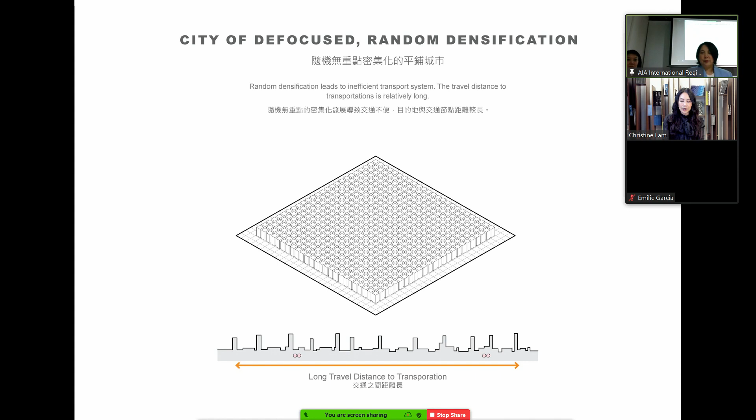Defocused city planning or random densification can lead to an inefficient transport system, where the travel distance to transportation nodes is relatively long. As such, high-density clusters are best positioned over existing transportation nodes to reduce journey time and frequency.

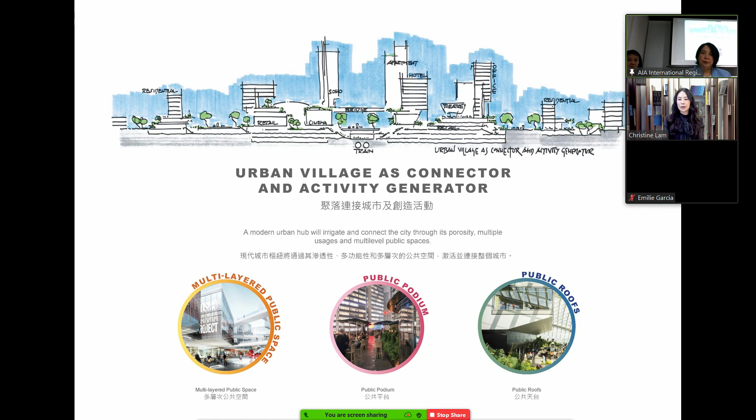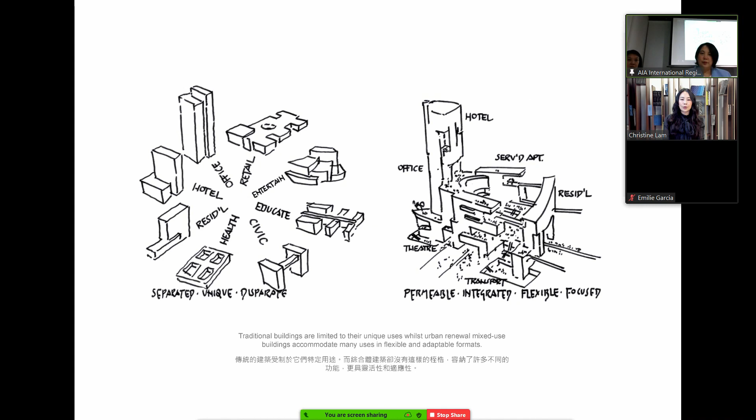A modern urban hub, as a connector and activity generator, will enrich and connect a city through its porosity, multiple usages, and multi-level public spaces. Traditional buildings are limited to a single use only, while urban renewal mixed-use buildings can accommodate many uses in flexible and adaptable formats.

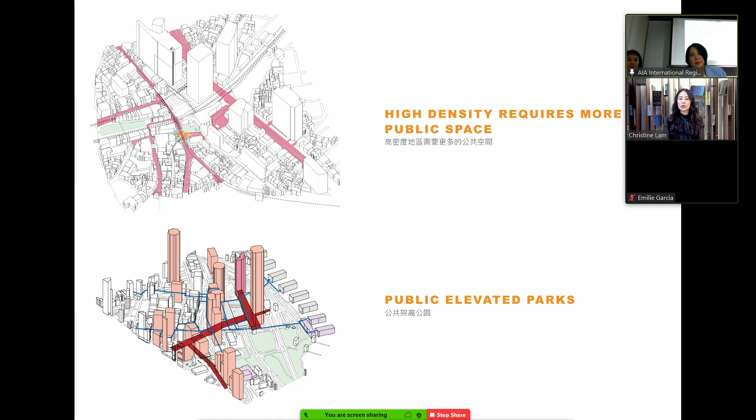Obviously, high density would require more public space for social and cultural interaction, more variety in functional usage, and more transportation means. Existing historic nodal points may already be located next to parks, greenland, and water bodies, so it is efficient to densify these nodes.

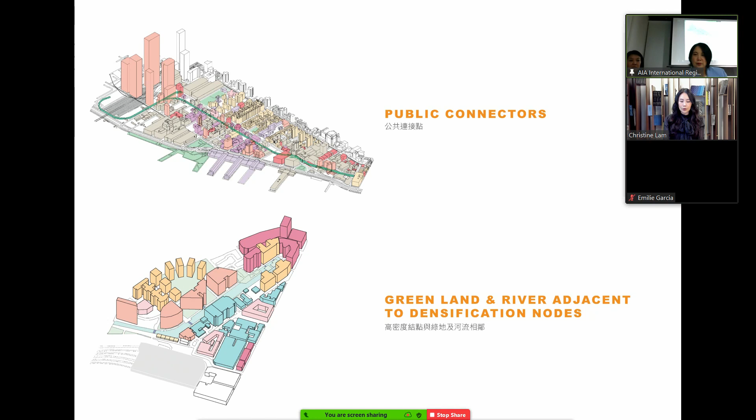Today, four examples are drawn from different cities to demonstrate the new urbanity. The first case study is Shibuya in Tokyo, a great TOD example of vertically stacked mixed programs in tower forms.

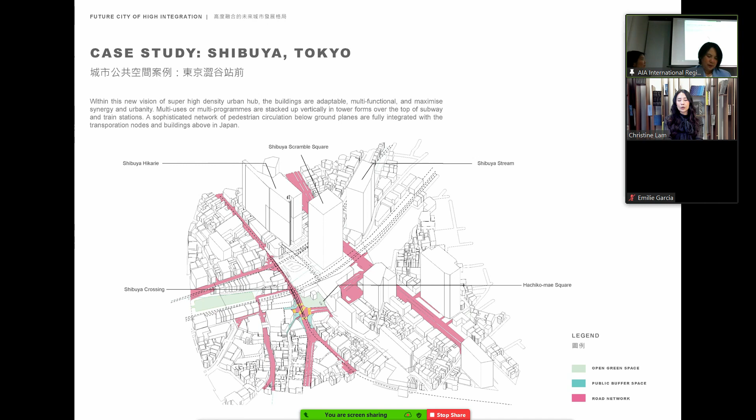The super high-density urban hub has been built right next to Hachiko train station and on top of the city metro lines. For people who don't know Hachiko station, if I say it's Shibuya's famous crossing, the station with a statue of the dog, that may ring a bell. The hub is fully integrated with a sophisticated underground circulation network to connect the city center.

New office commercial towers such as Shibuya Stream, Shibuya Hikarie, and Shibuya Scramble Square are all adaptable, multifunctional uses that maximize synergy and urbanity. You look at one tower, but it's got hotel, offices, conferencing facilities, theaters, and shopping malls, all in one tower form.

This demonstrates a mixed vertical city, a 24-hour city life, super vibrant, and it works not just for Tokyo but also for many other cities in Japan. The pedestrian crossing you see at the bottom left corner is the famous crossing in front of the Q Front Tower - a signature scene representing the Tokyo lifestyle.

The second case study brings us back here to Hong Kong Central. The elevated footbridge system connects office towers and shopping malls from the mid-level hills through the financial district, the IFC and Exchange Squares, all the way to the Harbourfront ferry piers. The blue lines you see are all the decks and bridges linking the towers.

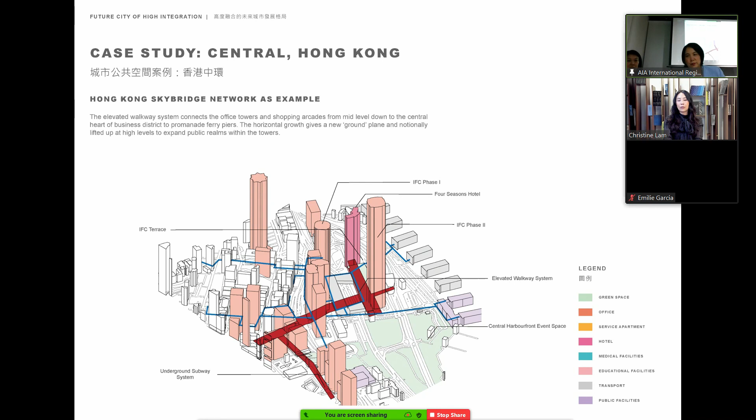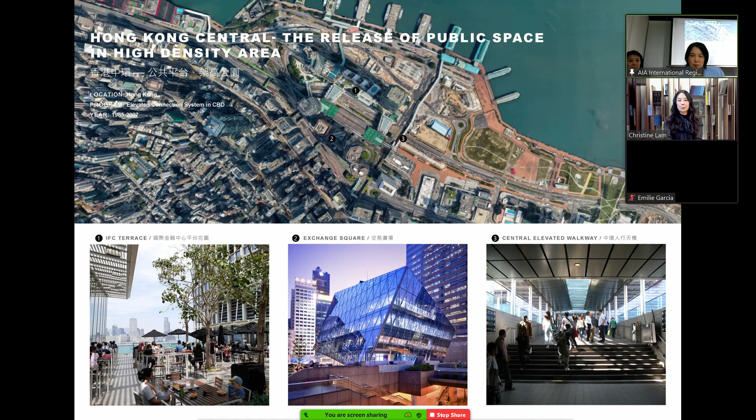Below ground, shown as the red box, is the MTR station box with tunnels and exits that link up the towers and malls vertically. So the horizontal growth gives a new ground plane, notionally lifted up at high levels, to expand public realms within towers and offer more open spaces.

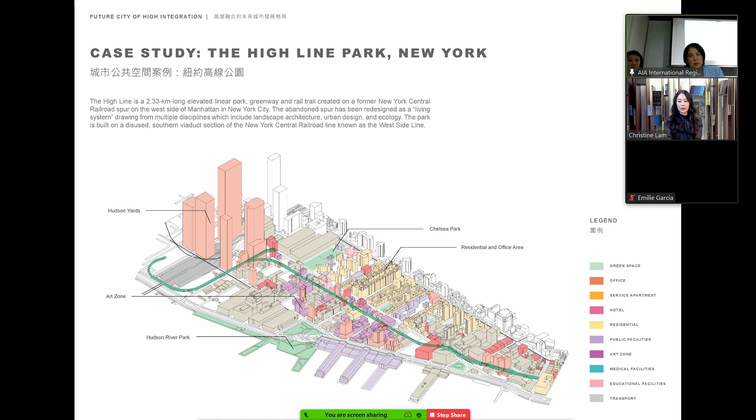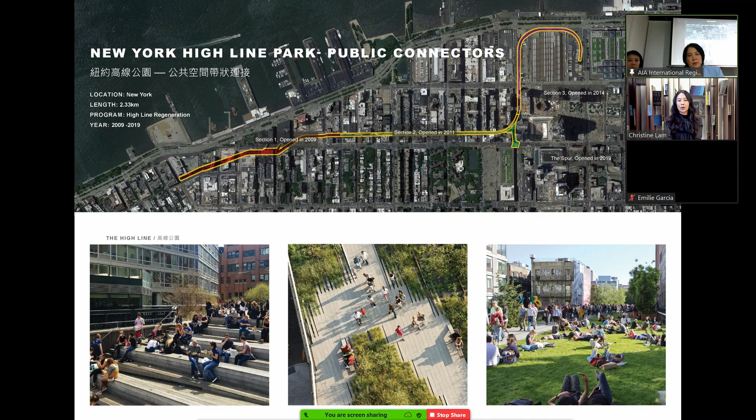New York's High Line is another example of a horizontal connector creating a new urban hub. An existing historical rail line track was transformed into an elevated linear park two kilometers long, stitching Hudson Yards with other mixed commercial, social, arts and cultural activities along the Hudson River. It totally revived the old neighborhood from a disused area of industrial buildings into an energetic community of working, living, and recreation, full of city life.

In West London, the regeneration of Paddington Basin is an industrial redevelopment creating a vibrant new office quarter close to the City and West End. It is just 15 minutes from Heathrow Airport via the Heathrow Express, making it a highly desirable commercial location.

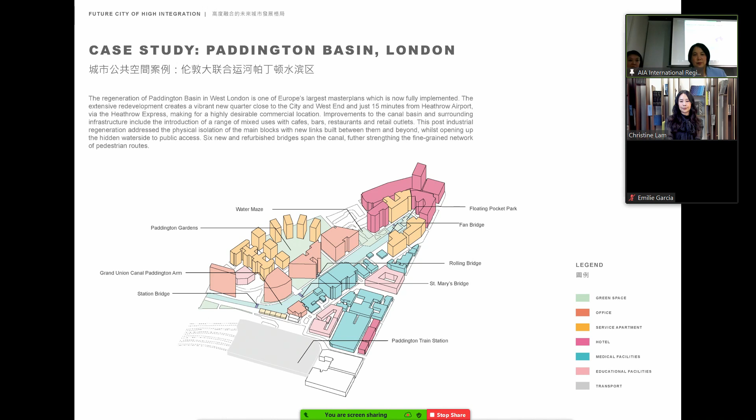The planning includes six new or refurbished bridges spanning the canal to strengthen the fine-grained network of pedestrian routes. The introduction of a range of mixed uses with cafes, bars, restaurants, and retail outlets not only supports the local community but also draws many visitors. The urban landscape is enhanced by opening up the hidden waterside to public access.

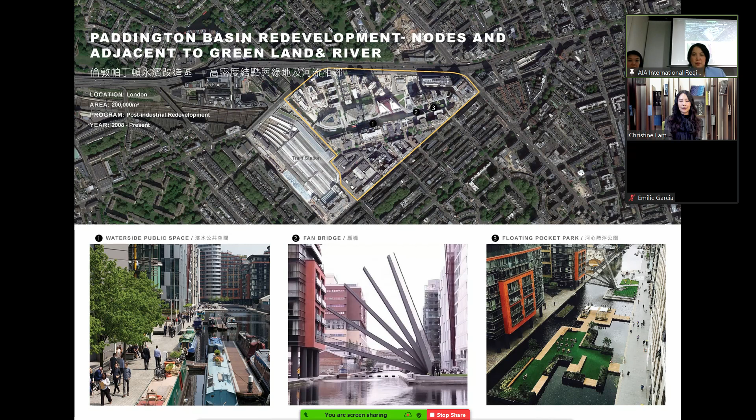In conclusion, we learn from these case studies that well-planned high-density urban hubs can create live, work, and entertain dynamics. Modern mixed-use development models can integrate open space with mixed recreational, residential, and commercial use.

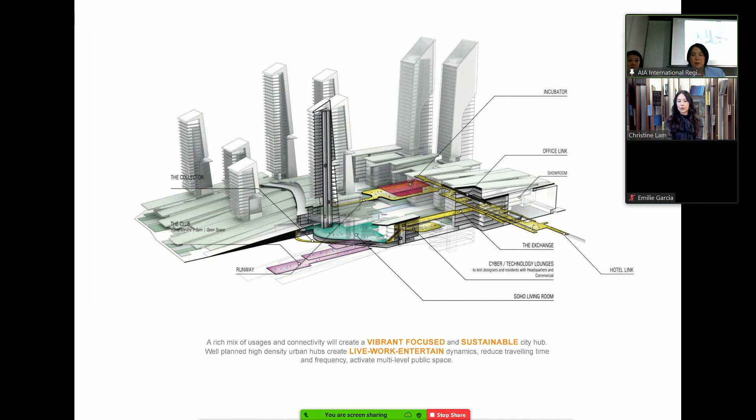Up to year 2020, there are a total of 686 cities in China. Over 60% of the population are now living in cities. So rapid urbanization, if not controlled or unplanned, could lead to inefficient urban sprawl, increasing social inequality, overbuilding expensive infrastructure, and pollution exacerbated by longer commutes.

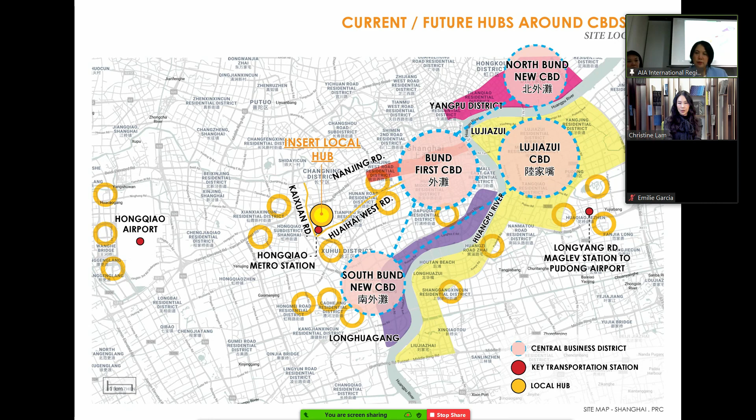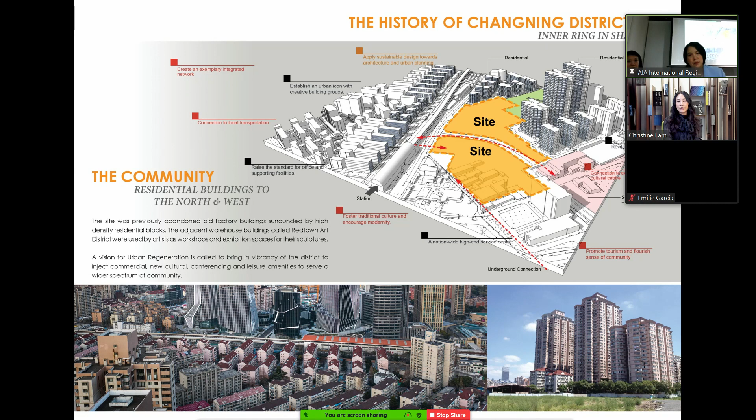Changning District is an old, dense residential area where the project site is a brownfield regeneration—it was an abandoned old factory site. After the buildings were cleared out, instead of hoarding up the site, the client planted a yellow rapeseed field and opened it for the public and neighbors before construction started.

Right next to the site, the adjacency is a group of warehouses called Redtown. It is an artist village with workshops and storage, but it was underused and lacked interaction with the neighborhood.

Within an old city fabric of dense population, the Shanghai government enacted its vision to energize the Changning community by creating a new local hub as a strategic node close to the Nanjing Road city center.

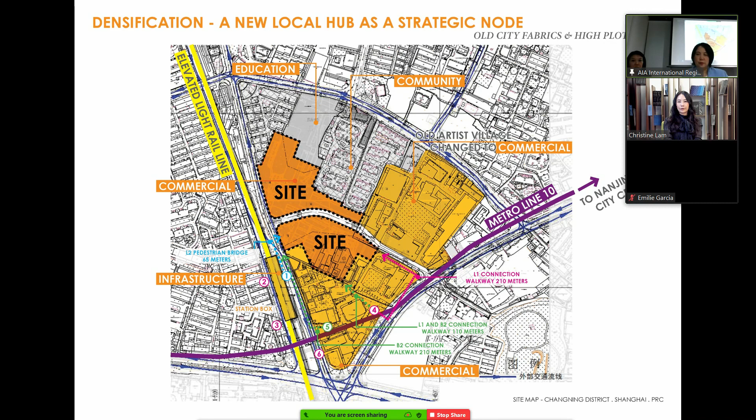Next to our site, shown in light orange, is Red Town, which has already been rezoned to commercial use and is now under construction. Combining all 3 parcels in orange color, since they are all commercial use, forms a sizable local hub of mixed-use development that joins up with the local fabric of residential area to become a bigger community.

The brief called for a mixed-use development to form a bigger community—a place to live, to work, and to play.

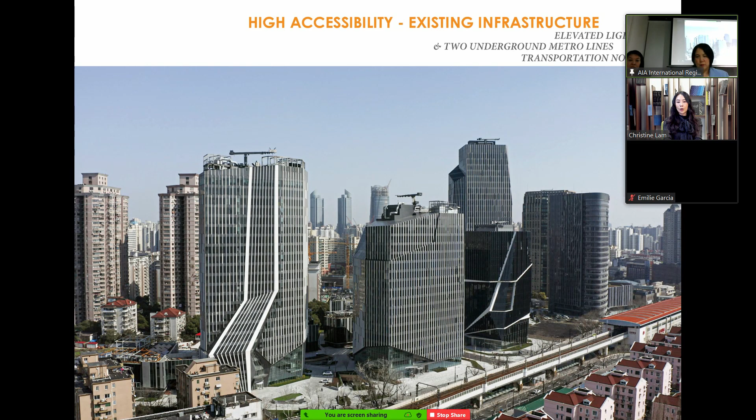The site fits perfectly the urbanization requirement, like high accessibility to existing infrastructure. To the bottom right you can see the elevated light rail station, which is only within 5 minutes walk to 2 other metro lines underground.

In order to create a vibrant business and social hub, there must be mixed programs offering a variety of building functions such as retail, office, arts, cultural, and exhibition. The conventional financial district only focused on office use with very few amenities, but an integrated community hub proves the success of a symbiosis of working and social experience.

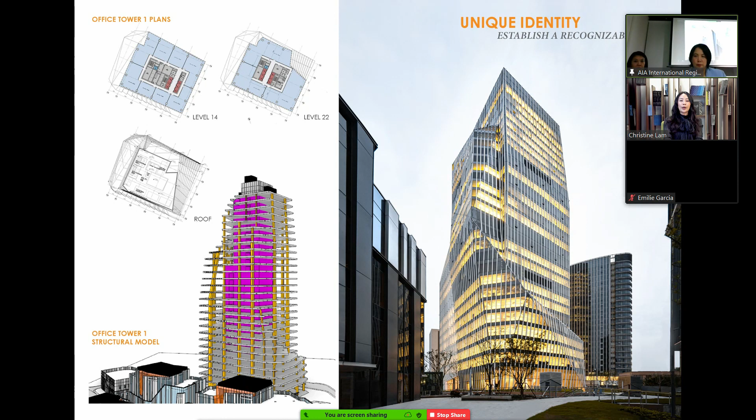A community also looks for a sense of place. A unique architectural identity would help establish a recognizable icon for the public.

There are a total of 4 towers in this project, and you're looking at one of the towers, which is the tallest, at 140 meters tall, with a funky form.

Distinctive character was designed for each tower, so the tower forms varied for all 4 towers. It is a collection of sculptural objects forming the new cityscape.

The site is an odd and irregular shape cut into half by a public road. Placing all 4 towers away from the existing residential towers is a sensible approach, but more importantly, our towers are not blocking the solar access to the existing residential units.

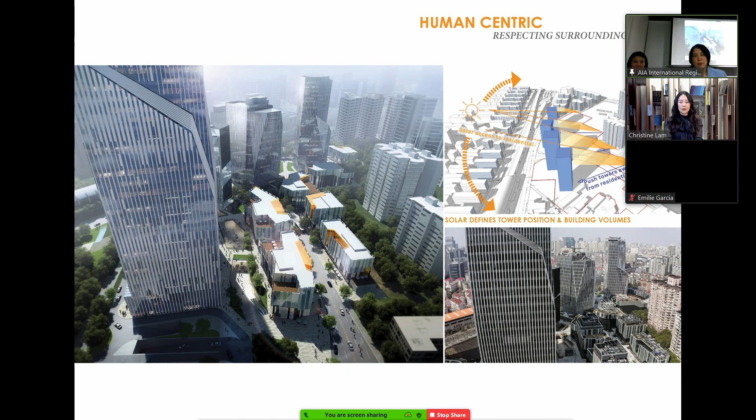By building codes, we have to ensure the existing residential units all have a minimum of 1 hour solar access on the solstice day through the lounge window and bedroom window. Therefore, the solar constraint basically defines the permissible build volume, shown as the orange wedges in the top diagram. The resultant mass of our buildings is cut and shaped to fit within the orange jelly boundaries.

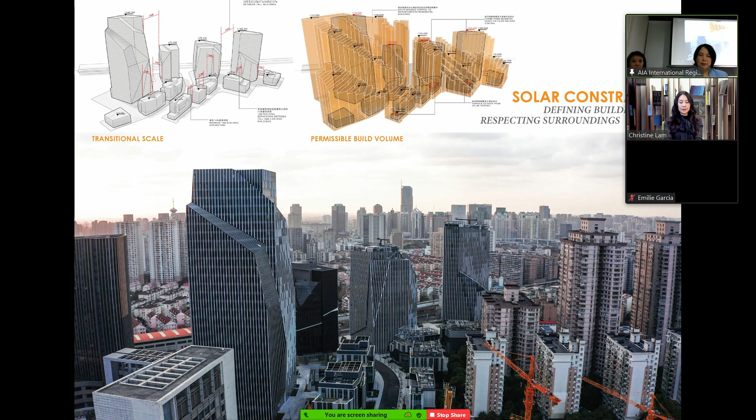The building forms gave us the inspiration of the rock-cut mountain in Chinese ink painting of landscape, depicting solid and void through strokes of lines. The painting technique was translated into our facade design.

The line strokes become the vertical thin features that give a very good sun shading effect. The solid pattern also helps reduce light pollution to the surroundings by simply reducing the glazing ratio of the curtain wall.

Since 2020, Shanghai is promoting a sustainable business center model 3.0, where the first CBD on the Bund is version 1, Lujiazui CBD on Pudong is version 2, and business center version 3 asks for diversified, adaptive, and flexible use of space, making the business center a sustainable place to be.

Our project started design in 2015, six years ago. Back then, the client already had the vision to create a new office hub to attract startups, tech companies, creative industries, and the like.

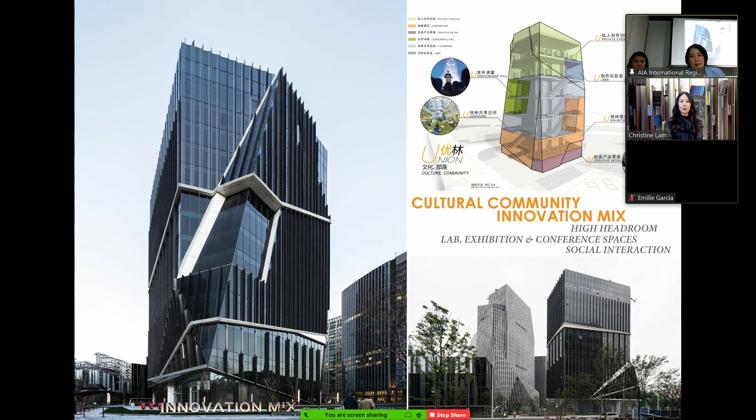One of the towers, the black little tower, is designed to be a vertical stacked cultural exhibition center. It is a flexible floor space to accommodate labs, conferencing facilities, and showrooms, with 9 meter tall floor-to-floor flexible space stacked up vertically in the tower.

Combining with the office function, holistic business amenities to support office growth is vital to make the local hub sustainable. The master plan has also considered maintaining neighborhood quality.

One of the key features of Old Shanghai Village is the Li Long streetscape, and we chose street pavilion blocks over a big podium solution to make the site very permeable on grade.

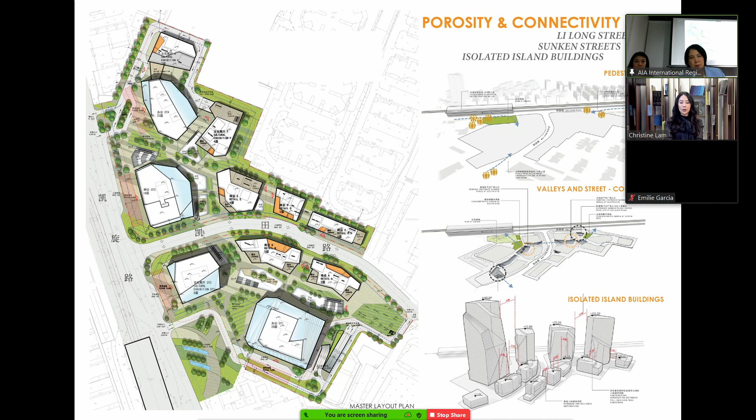The small blocks are retail shops, cafes, and restaurants that can spill out to activate the streets. The upper floors are flexible spaces for workshops and experiential retail. Two rows of pavilion blocks form a retail spine that stitches the site together.

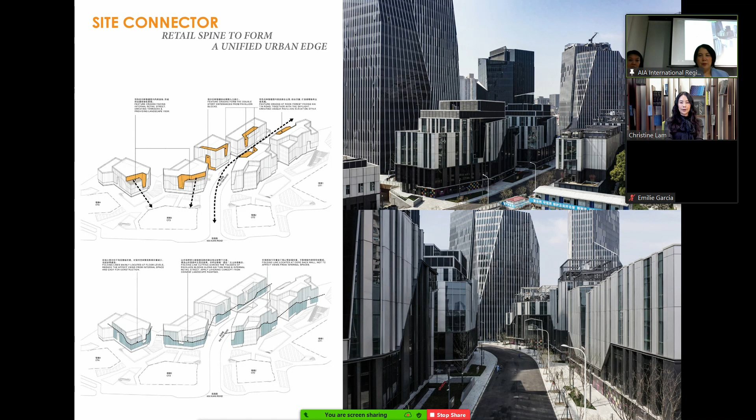A unified but porous urban edge gives a better transition of scale from high-rise to neighborhood sense of street. The porosity of building blocks also allows more daylight and air ventilation to the streets.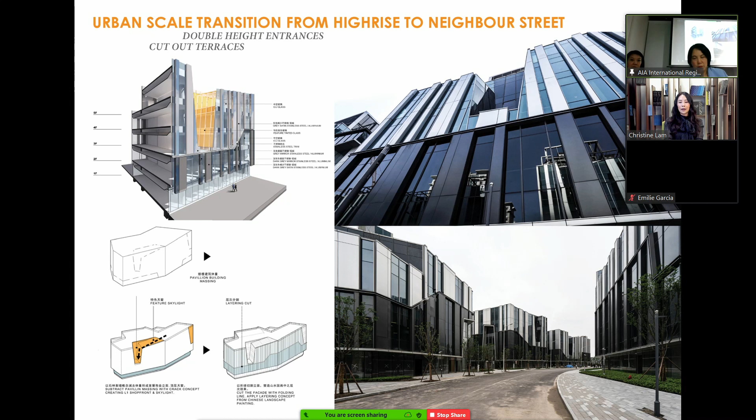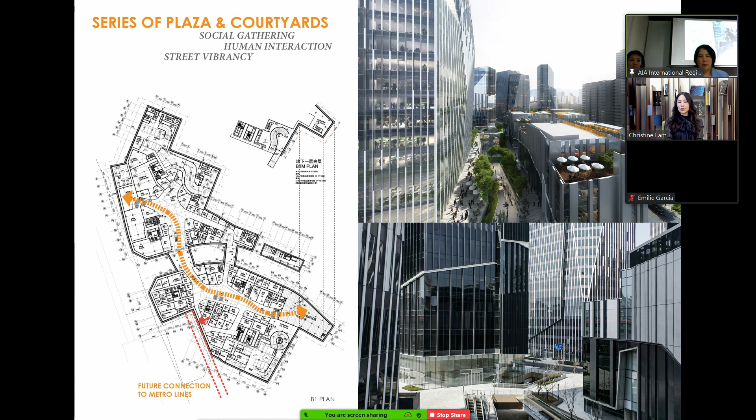Sunken streets are laid underneath the existing road network to link up the basement retail to the metro station tunnel within a barrier-free and traffic-free environment.

A series of plazas and courtyards are provided for social gathering that promotes human interaction and street vibrancy.

With the fusing of a commercially viable mixed-use development with arts, cultural exhibition, business, and social functions, this entire development will become part of the community's daily lives. The new offices and retail will bring more job opportunities to the area and attract new families moving into the neighborhood, fulfilling the urban regeneration purpose.

And by the way, why is this project called I'm Shanghai? I've been asked this question several times, and people joke, are you Shanghai? Well, if you noticed the building signage from one of the site photos earlier, I am Shanghai means Innovative Mix Shanghai. That's the project name. Thank you very much.

Thank you. So I will present my questions first to those speakers, and then if you can share your thoughts and your experience with us.

The first question is on sustainability and how you both felt the project would address what we are facing today. We always talk about sustainable cities for architecture and sustainability, and usually we strive to make the city safer and create architecture that is actually friendly to people. Urban renewal projects require large investments and a partnership between the private and public sectors, and from the experiences you've shared, it's a very difficult collaboration. Architects usually try to find a balance and the most optimal plan and design. So can you share how you strive to make it more sustainable, creating friendlier open spaces for people? And how do you deal with the fact that a renewal project might become a hub that doesn't communicate with the neighborhood around it? How do you find the best design tools to finalize your design? That would be my first question.